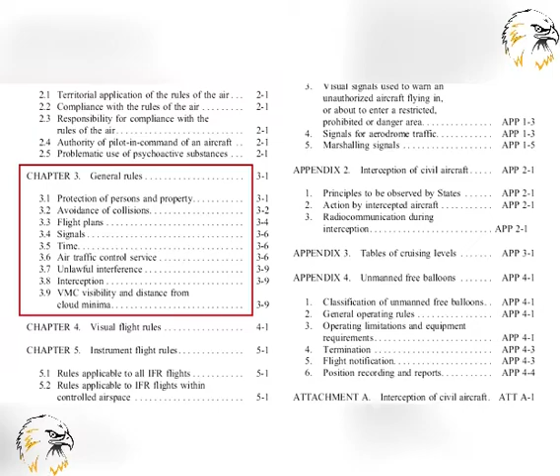The first part of Chapter 3, Annex 2, deals with the protection of persons and property. As you see, the key statement here is that an aircraft is not to be operated in a negligent or reckless manner so as to endanger the life or property of others.

One of the central tenets of this rule is that there is a minimum height below which aircraft may not be flown. The ICAO minimum height rule states that, except where necessary for takeoff or landing, or except when express permission is given by the appropriate authority, an aircraft may not be flown over the congested areas of cities, towns, or settlements, or over an open-air gathering of people, unless the aircraft is at such a height that will permit it, in the event of an emergency arising, to make a landing without causing undue hazard to persons and property on the ground.

This general minimum height rule should not be confused with the minimum specified height rules applied to IFR or VFR flight. You have learnt about minimum heights for VFR and IFR flight in the previous two lessons. But because aircraft are always flying in accordance with either the instrument flight rules or the visual flight rules, you may ask yourself how you reconcile those rules with the general minimum height rule just quoted.

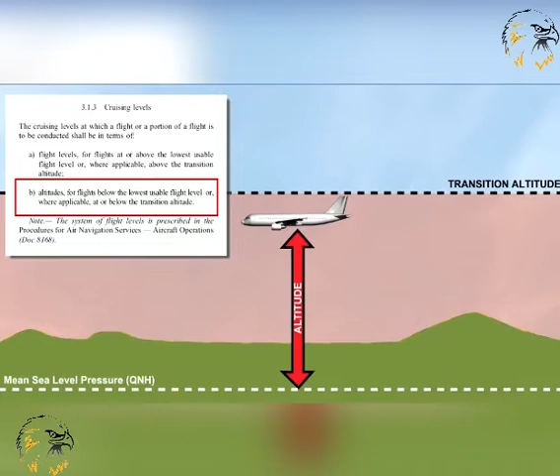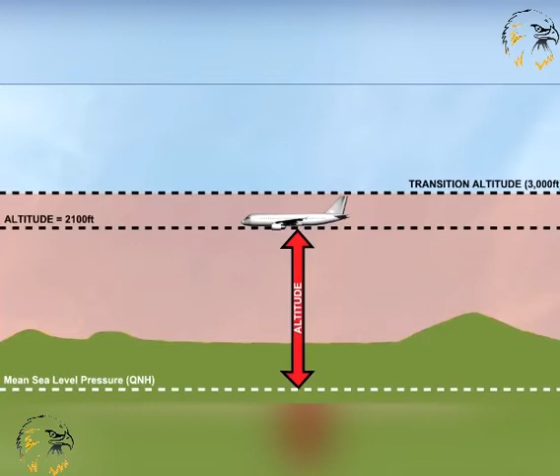Over countries whose topography includes high ground and mountains, the transition altitude will be higher than over a low-lying country. For example, in the United Kingdom, the transition altitude is generally 3,000 feet, with certain exceptions, such as around Heathrow and Glasgow. In the United States, though, the transition altitude over most of the country is 18,000 feet, while in New Zealand, the transition altitude is 13,000 feet.

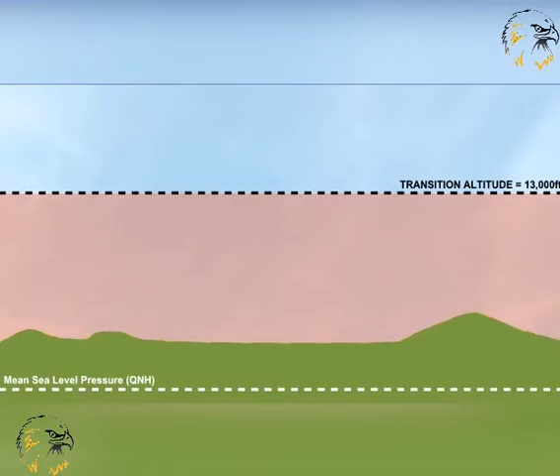Above the relevant transition altitude, the air traffic services monitor and pilots report the vertical cruising position of aircraft by reference to flight levels. Flight levels are measured with respect to a standard pressure setting of 1013.2 hectopascal or millibars. The lowest usable flight level above the transition altitude is called the transition level.

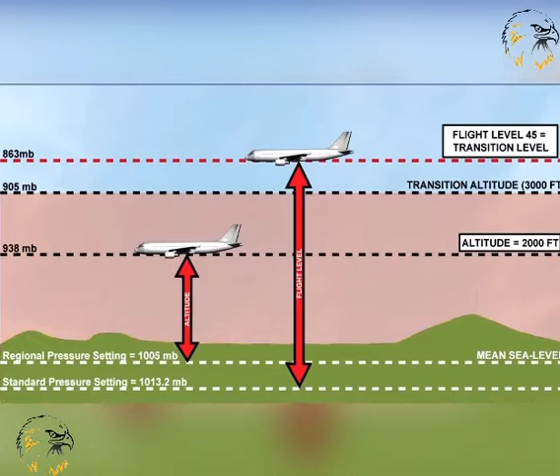You should note that while a transition altitude is set by a national aviation authority, transition levels are not fixed, but change with changing atmospheric pressure. So, on a given day, the transition level might be flight level 45, for instance, as shown here, or, as in this example, flight level 40.

The phenomenon of changing values for the transition level can be awkward to understand. You should take time to study the phenomenon on your own by referring to the lesson on altimetry in the subject of meteorology.

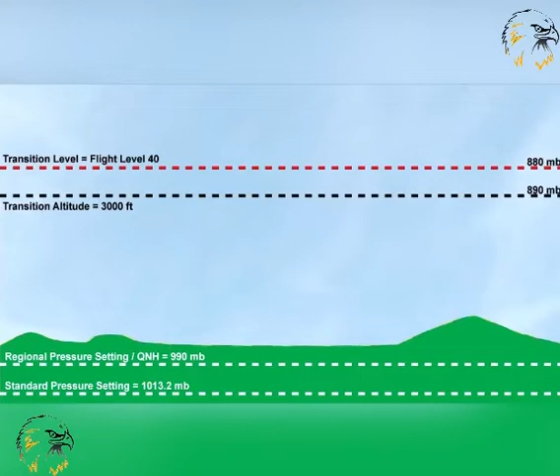Now let's move on to avoidance of collision. In all aircraft operations, it is of supreme importance that rules be established to help keep the risk of collision between aircraft to an absolute minimum, whether the aircraft are in the air or on the ground.

When aircraft are under radar control and flying in accordance with the instrument flight rules, collision avoidance is the responsibility of the air traffic controller as well as that of the pilot. And so the rules of the air on collision avoidance may seem to apply predominantly to aircraft flying in accordance with the visual flight rules.

Nevertheless, collision avoidance rules must be observed and put into practice by all pilots. It is crucial that flight crew never relax their vigilance in seeking to avoid collisions between aircraft in flight, regardless of the type of flight, or of the class of airspace in which the aircraft is operating. Vigilance of flight crew on the ground is also of great importance.

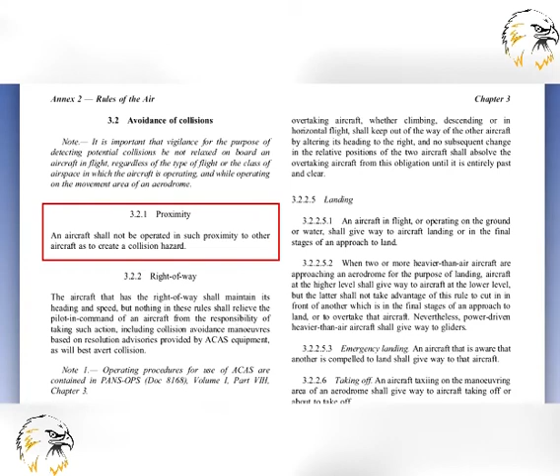One of the most fundamental rules of collision avoidance is the proximity rule. That rule states that an aircraft is not to be operated in such proximity to other aircraft as to create a collision hazard. This, of course, is the reason why aircraft are not to be flown in formation, except by

prearrangement between the pilots in command of the aircraft taking part in the flight. If the formation flight is to take place in controlled airspace, the flight must be in accordance with the conditions prescribed by the appropriate air traffic services authorities.

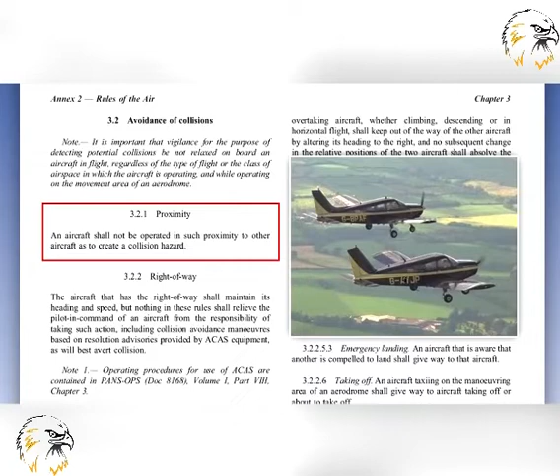It is in order to help ensure that collisions between aircraft do not occur that rules concerning rights of way have been established. In all rules pertaining to right of way, the aircraft which has the right of way maintains its heading and speed. However, it is crucial that pilots understand that no right of way rule relieves the pilot in command of an aircraft having the right of way from the responsibility of taking avoiding action should it prove necessary.

The pilot of the aircraft required to give way may not have seen the other aircraft. It can easily be fatal in the air for a pilot to insist on his priority. It is incumbent on all pilots to take action to avoid collision. This principle includes action to avoid collision based on resolution advisories provided by ACAS equipment. ACAS is the Airborne Collision Avoidance System, equipment that seeks to warn pilots of the proximity of other aircraft.

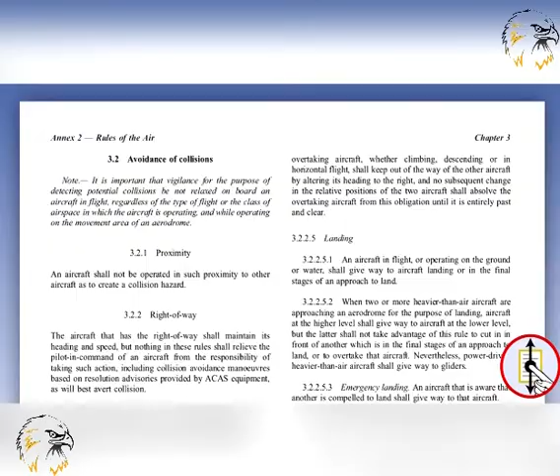The remainder of this lesson deals with specific rules of the air from Chapter 3 of ICAO Annex 2, which pertain to avoidance of collision and rights of way. An aircraft which is obliged by the rules which follow to keep out of the way of another aircraft must avoid passing over, under, or in front of the other aircraft unless passing well clear. Aircraft taking avoiding action must also take into account the effect of wake turbulence.

If two aircraft are approaching head-on and there is a danger of collision, both aircraft are to alter heading to the right. It is generally accepted that anything within the sector 20 degrees either side of dead ahead is head-on. This is particularly important nowadays, as navigation equipment is so accurate that it will place aircraft exactly on the center line of airways. All it takes is an incorrect flight level assignment or poor height keeping, and a head-on situation is much more likely to occur than it used to be.

When two aircraft of the same category, for instance two powered heavier-than-air aircraft, are converging at approximately the same level, the aircraft which has the other aircraft on its right is to give way. Expressed simplistically, the aircraft on the right is in the right and should maintain speed and heading.

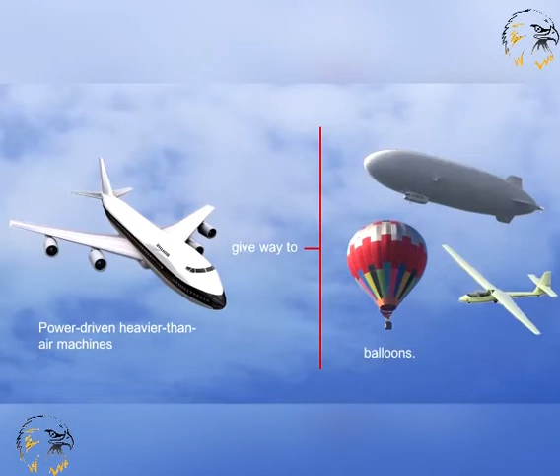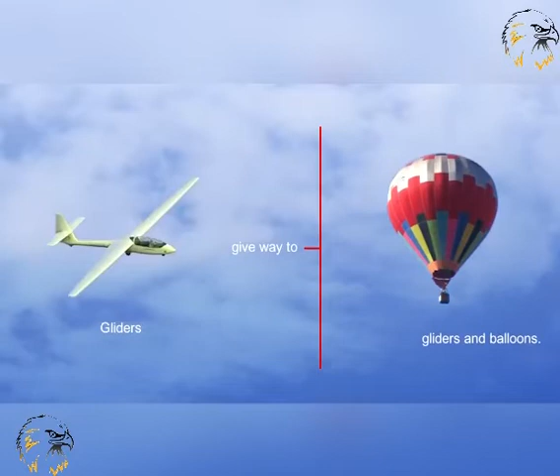Where the converging aircraft are not of the same category, being on the right does not automatically give that aircraft the right of way. In the case of different categories of aircraft, the following right-of-way rules apply. Power-driven heavier-than-air machines are to give way to airships, balloons and gliders. Power-driven lighter-than-air machines, for instance airships, are to give way to gliders and balloons. Gliders are to give way to balloons. Power-driven aircraft are to give way to aircraft which are towing other aircraft or objects.

Here is a summary of the right-of-way rules in the air when aircraft are converging. Never insist on your right-of-way. Even if you have the right-of-way, always be prepared to take avoiding action yourself if the other aircraft does not.

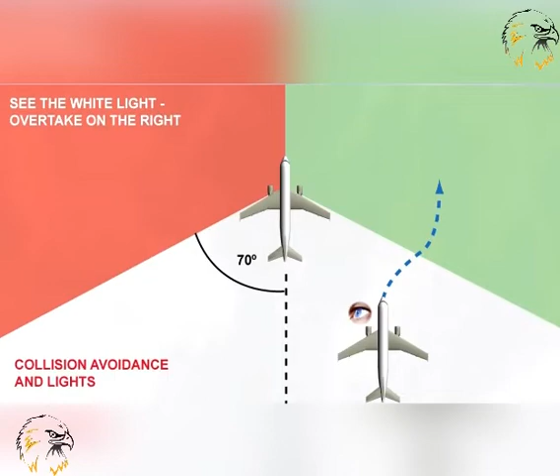Now let's look at the situation of overtaking. An overtaking aircraft is a faster aircraft that approaches another aircraft from behind, within a 70-degree arc either side of the tail of the aircraft being overtaken. At night, the overtaking aircraft in this position would be unable to see either of the other aircraft's port or starboard navigation lights. It is the aircraft which is being overtaken that has the right of way.

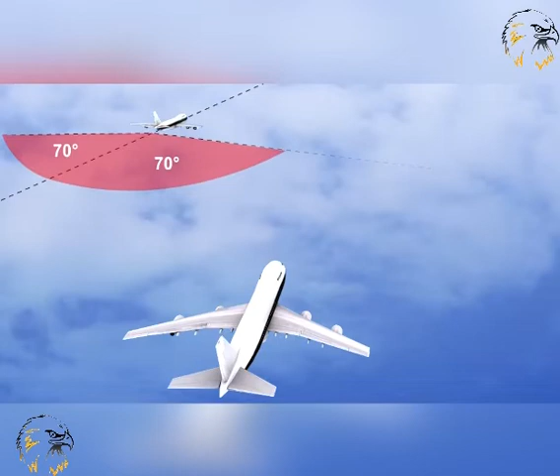The overtaking aircraft, whether climbing, descending, or in horizontal flight, must keep out of the way of the other aircraft by altering its heading to the right. The overtaking aircraft must stay out of the way of the aircraft being overtaken until well clear. Furthermore, the pilot of the overtaking aircraft should take into account the wake turbulence which might possibly affect his own aircraft or the aircraft being overtaken during the overtaking maneuver.

Now let's move on to the question of priority on landing. An aircraft in flight or operating on the ground or water is required to give way to aircraft landing or in the final stages of an approach to land. When two or more heavier-than-air aircraft are approaching an aerodrome for the purpose of landing, aircraft at the higher level must give way to aircraft at the lower level.

But the lower aircraft must not take advantage of this rule to cut in front of another aircraft which is in the final stages of an approach to land, or to overtake that aircraft. In any event, power-driven heavier-than-air aircraft are to give way to gliders. An aircraft whose pilot is aware that another aircraft is compelled to land because of an emergency must give way to that aircraft.

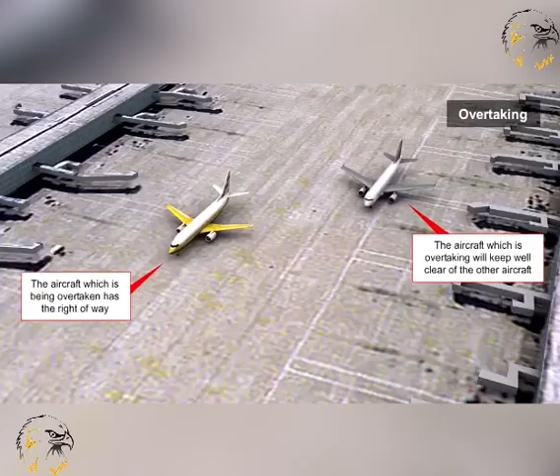Any aircraft which is being overtaken by another aircraft has the right of way. The overtaking aircraft must keep well clear of the aircraft being overtaken. That completes the lesson on minimum height, cruising levels, and avoidance of collisions.